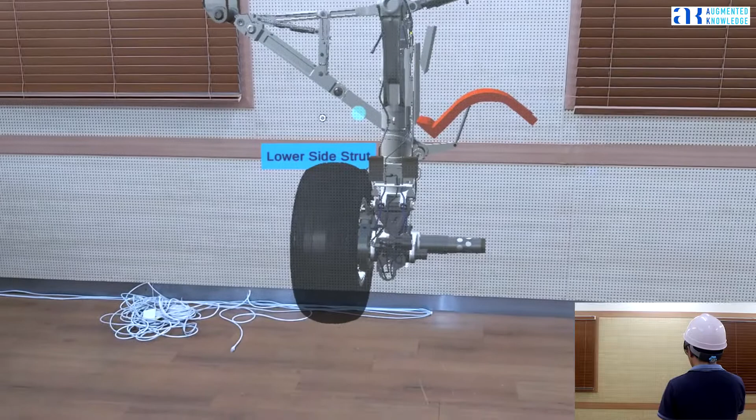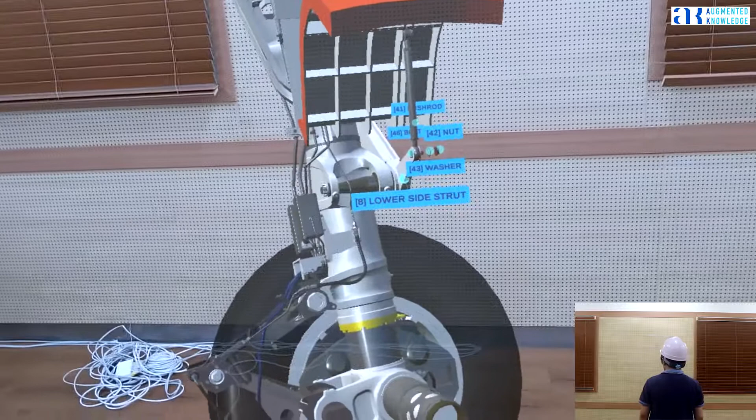Disconnect the lower side strut assembly, lower 8 from the pushrod 41. A. Remove the nut 42, washer 43 from the bolt 46. B. Remove the bolt 46 to disconnect the lower side strut assembly, lower 8 from the pushrod 41.

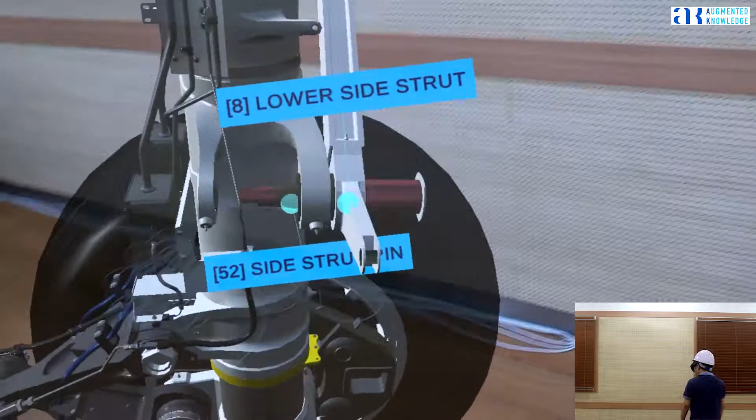D. Remove the side strut pin 52 to disconnect the lower side strut assembly, lower 8 from the shock strut 51. B. Remove the bolt 11 from the side strut pin 7. C. Remove the end cap 9 from the side strut pin 7.

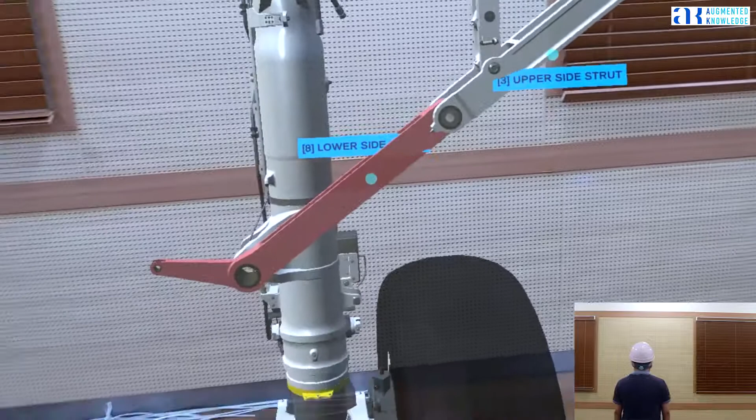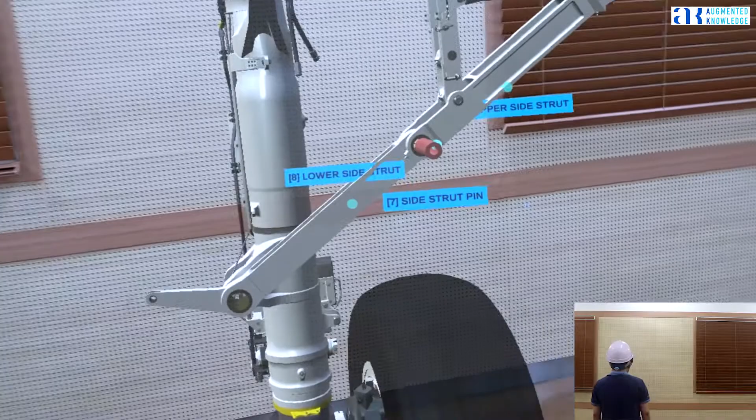D. Use a rope to support the upper end of the lower side strut assembly, lower 8 and attach the rope to the outboard side of the reaction link assembly 15. E. Remove the side strut pin 7 to disconnect the upper side strut assembly 3 from the lower side strut assembly, lower 8.

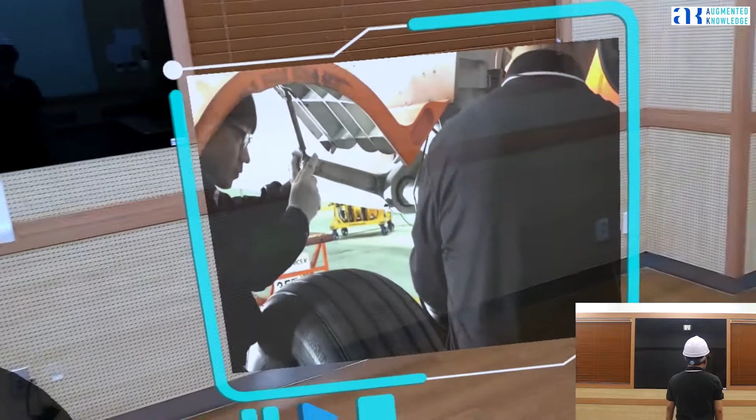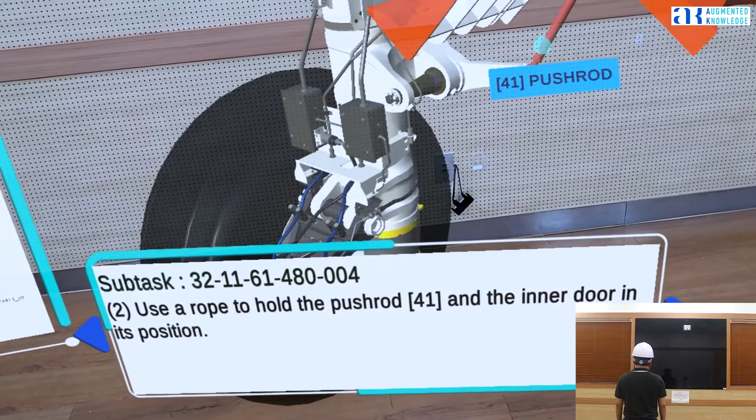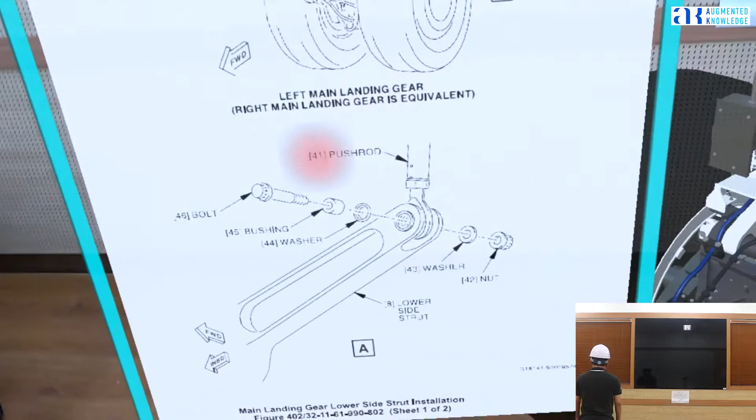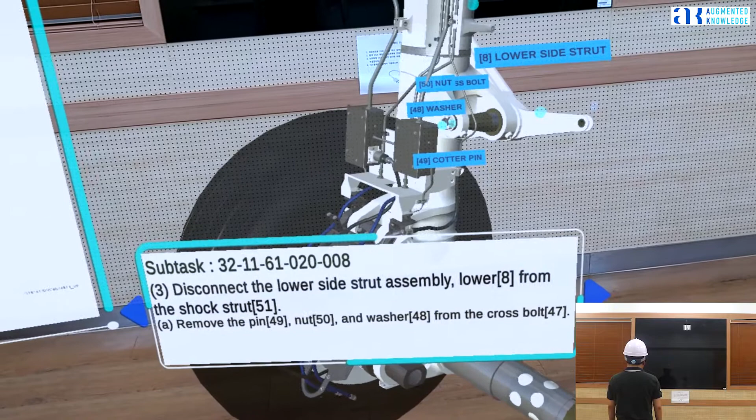Two. Use a rope to hold the pushrod 41 and the inner door in its position. Three. Disconnect the lower side strut assembly, lower 8 from the shock strut 51. A. Remove the pin 49, nut 50, and washer 48 from the cross bolt 47.

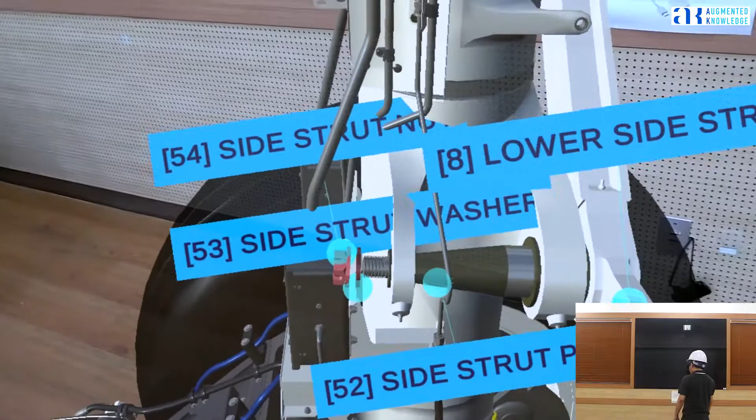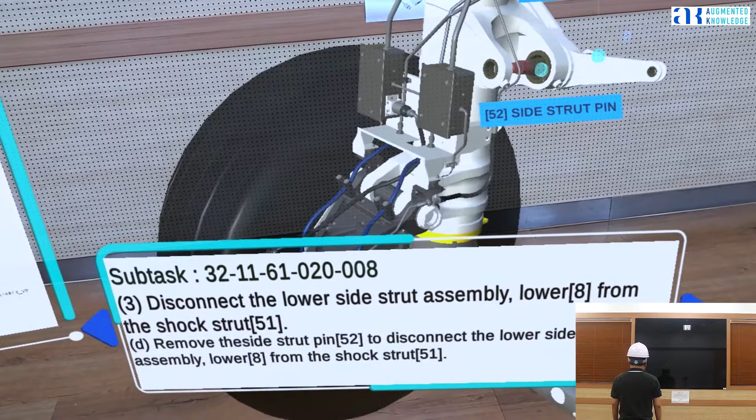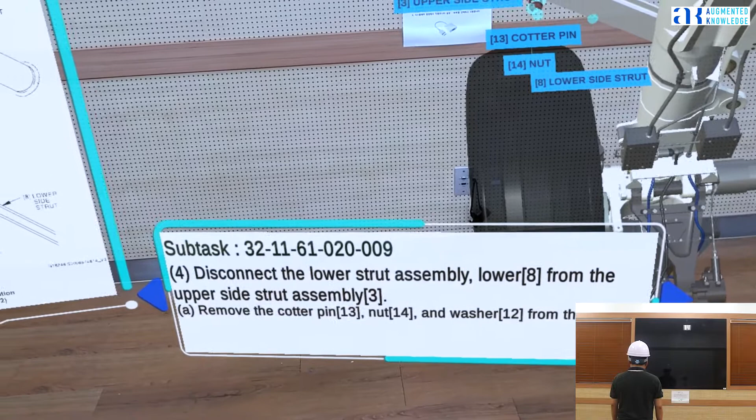D. Remove the side strut pin 52 to disconnect the lower side strut assembly, lower 8 from the shock strut 51. 4. Disconnect the lower side strut assembly, lower 8 from the upper side strut assembly 3. A. Remove the cotter pin 13, nut 14, and washer 12 from the bolt 11.

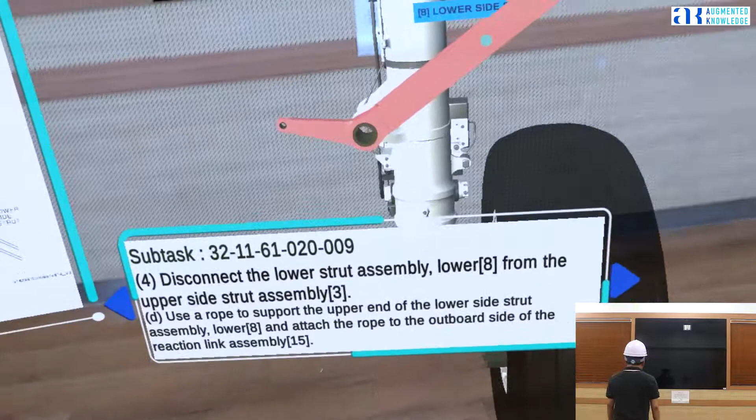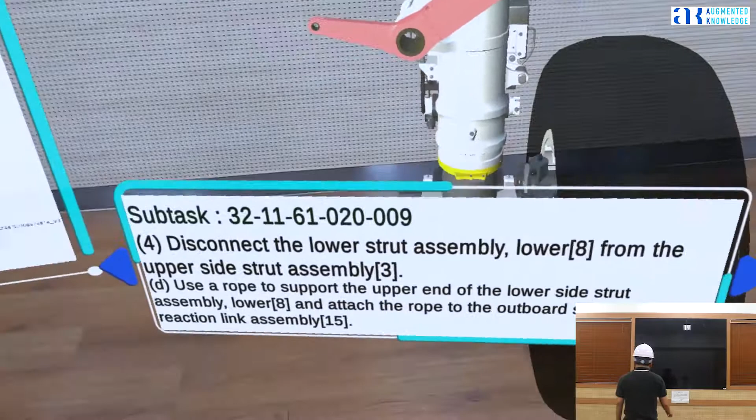D. Use a rope to support the upper end of the lower side strut assembly, lower 8 and attach the rope to the outboard side of the reaction link assembly 15. E. Remove the side strut pin 7 to disconnect the upper side strut assembly 3 from the lower side strut assembly, lower 8.